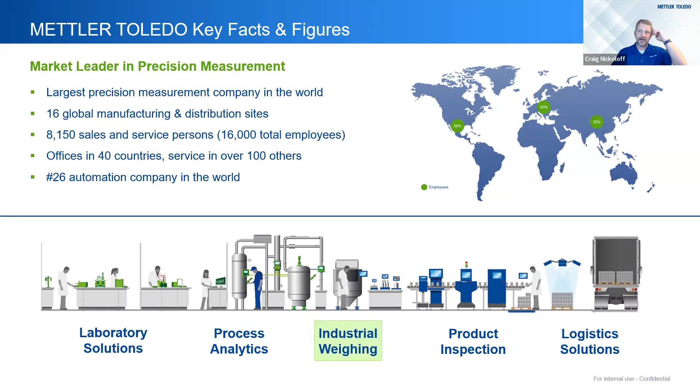And then finally, we are the number 26 automation company in the world. You wouldn't necessarily think that from precision measurement, but we've developed some products that interface in a very friendly way with a lot of automation products out there, whether it be Rockwell or EtherCAT or Siemens and whatnot. But we'll get into more of that later. Today, we are going to talk about our industrial weighing solutions and ways to specify components for that.

So a bit of a look at the portfolio that I'm talking about. Hey, we've got solutions for every application in weighing, whether it be from 1 microgram all the way up to 1 million kilograms. The demonstration of various product lines: our APW product line top left, bench portable and floor scales in the middle there, the platform scales, and then our weigh modules at the end.

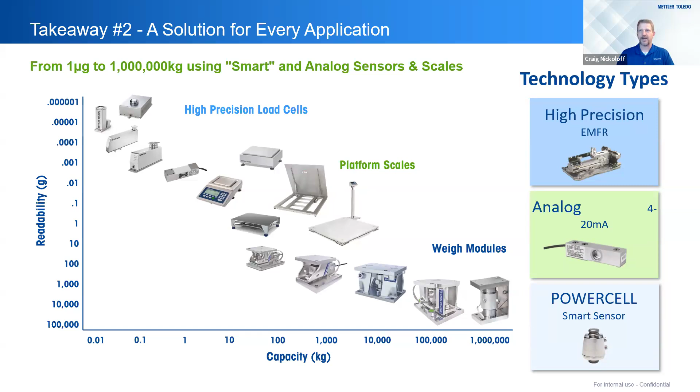And it varies whether it be analog to smart sensors. But that's just to give an idea of the components that you would be encountering when we're trying to specify sensors for your weighing applications. So first, we're going to take a look at the methodology for scale selection.

It's important to note that a capacity-based scale selection doesn't exactly account for accuracy. So we're going to look at 4 examples here, with the basis being: hey, we're weighing 1 kilogram of fine Swiss gold, and the cost per gram, at least at the time of creating this slide, was $75.57.

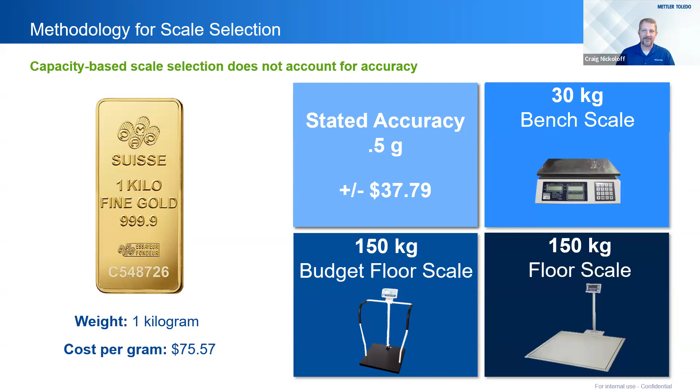So again, we're looking at 1 kilogram, not 1 gram, but the cost per gram is $75.57. So first, hey, if you're looking at a 3 kilogram balance, this particular one would have a stated accuracy of, let's say, 0.5 grams. So if you're looking at the variability based on that accuracy, there can be a variability of plus or minus $37.79. Again, half a gram, the cost per gram was $75.57.

Next, moving on to a 30 kilogram bench scale, the stated accuracy there in this particular case is 1 gram. So that variability, with that accuracy of 1 gram, is plus or minus $75.57. Moving on, let's look at a 150 kilogram budget floor scale with a stated accuracy of 0.1 kilograms, so 100 grams. That's a variability of plus or minus $7,557.

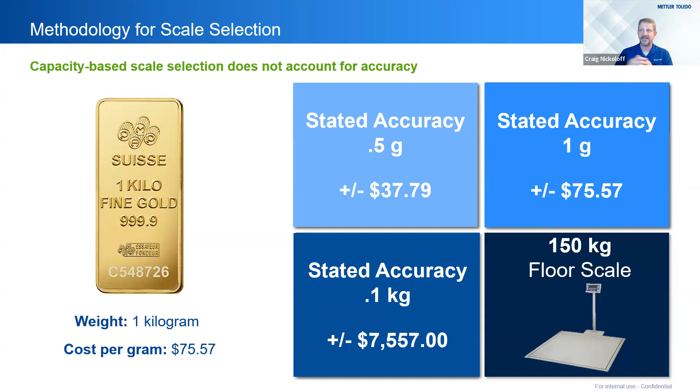So notice that we moved up in capacity here as we were looking at these. But let's take a look at a 150 kilogram floor scale that actually has a measurement uncertainty, a stated accuracy, of 0.2 grams in this case. 0.2 grams at that cost per gram is plus or minus $15.11. So that accuracy matters when you're trying to specify a solution based on what you're looking for. Because again, as we're looking at the 3 kilogram scale in that first example with that half gram variability, plus or minus $37.79, we're less than half that at a 0.2 gram accuracy.

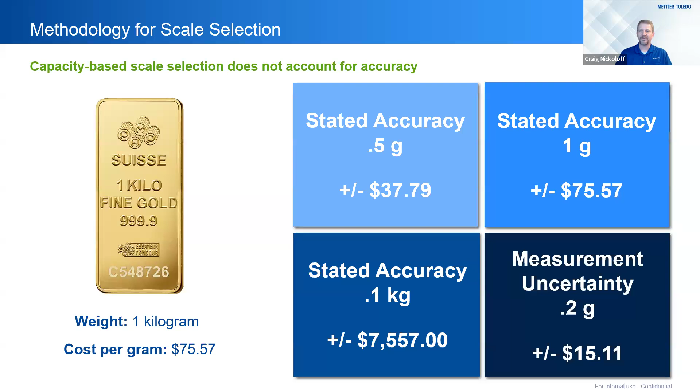So measurement uncertainty is stated there. We're going to get a little more into that as we go further into the presentation.

So, measurement uncertainty: accuracy is relative to the process tolerance. So close enough equates to accuracy. It depends on the user's needs, and it has nothing to do with level of detail or digits beyond the decimal. So we've established that no measurement is exact, because you've got that uncertainty no matter what sort of measurement you're taking. So there's some level of uncertainty in any number that we see. The user has to decide how much uncertainty in that number is acceptable before it becomes an unusable measurement. They have to determine what they want to be usable, and outside of those bounds, it's an unusable measurement. That's called a process tolerance.

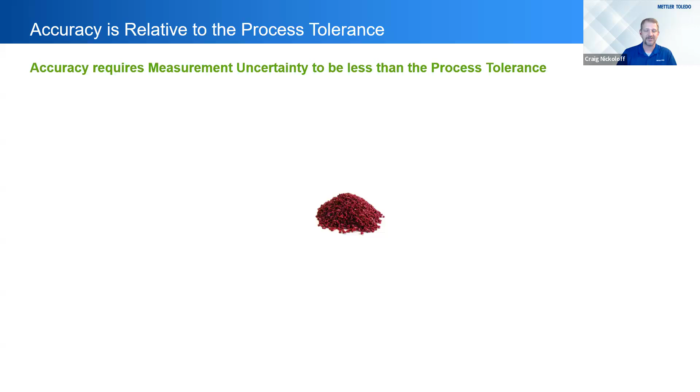Accuracy is the condition in which a measurement has less uncertainty than the process tolerance permits. So exceeding it makes the measurement inaccurate. And we'll take a look at that here with this example.

So what we're looking at here is 100 kilograms of this product, this red powder, with a measurement uncertainty of 0.5%. That translates into 0.5 kilograms in this case. So you can be plus or minus half a kilogram, giving 99.5 kilograms at the low end up to 100.49 kilograms at the high end. That's with a measurement uncertainty of 0.5%.

So let's say that the process tolerance was designated as plus or minus 1%. So you're accepting measurements within plus or minus 1%, so from 99 kilograms at the low end to 101 kilograms at the high end. Note that the measurement uncertainty noted there in blue is smaller than that acceptable process tolerance, so we would count this as an accurate weighment.

Now, if you flip that, and your process tolerance is 0.5%, but the measurement uncertainty of the scale you've selected is actually 1%, that measurement uncertainty is larger, wider than that process tolerance. So this application would then be identified as an inaccurate application. We just switched those two just to show you the relationship between process tolerance and measurement uncertainty.

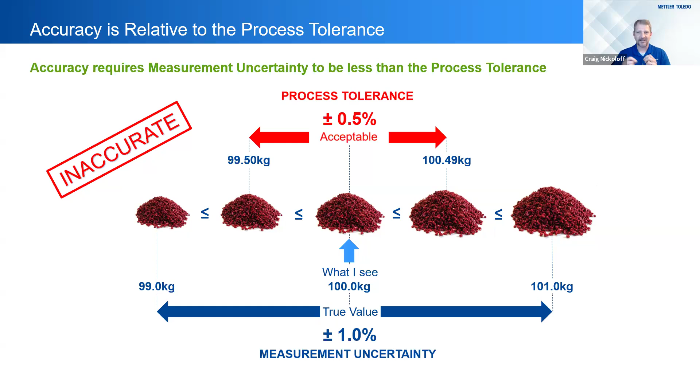We always want that process tolerance to be larger than the measurement uncertainty. And we'll get into how to identify those as we move along.

Quick note here, Mettler Toledo, as a company, defines measurement uncertainty for weighing components and configured systems in a report and methodology we refer to as GWP, good weighing practices. But we're just going to speak generically about the approach as we move along in the presentation. So you just need to define the accuracy requirements.

Things to think about: the criticality of your application. Are your measurements incredibly important? Is there a high risk in that you're measuring, say, multiple materials in a vessel? There's high cost materials—what happens if you have to scrap a batch or something? Is it a massive hit to the bottom line of the company? Or is it just something that's been planned for and the material isn't all that expensive?

That falls into the low risk measurements. So low risk measurements: if you're just quantifying inventory, you want to make sure you know how much is in the tank—you're not necessarily selling out of that tank. Or maybe you're dosing and filling into intermediary vessels, so it's not dosing into a final product. You're just trying to make sure you have an understanding of what you're dealing with before you get into something a little more precise. Or you might have low cost materials as well.

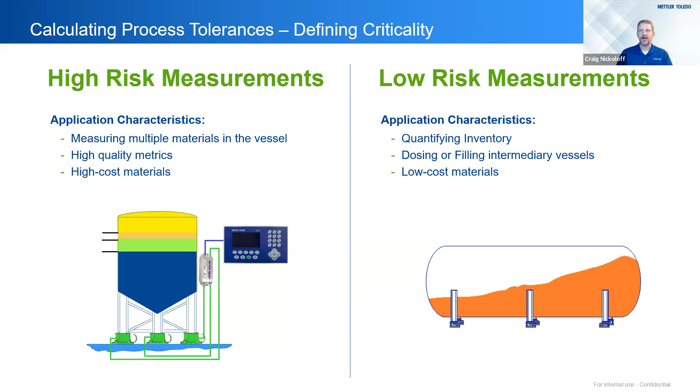So whether it's a high risk or low risk measurement, that feeds into helping you define how critical this part of the weighing process is for you. And that can then translate into identifying types of components and how accurate you would need to get in those weighments. So next, we talked about criticality—we'll talk about identifying acceptable error now.

Whenever you're considering a process, if there are multiple ingredients involved, you always want to use the tightest tolerance as the process tolerance. So in this example, looking at a few ingredients—flour, sugar, salt, butter—the tolerance is there. You could say, hey, we're willing to accept a tolerance of plus or minus 12.5 kilograms of flour, plus or minus 5 kilograms sugar, 2.5 kilograms salt, and half a kilogram of butter. So it would seem that half a kilogram is the tightest tolerance.

It is the tightest tolerance. Now you see the weights there in the middle. Those weights will help us understand a percentage that we need to account for in terms of a process tolerance. We'll take a look at that here.

Those translate into a tightest tolerance of 0.5%. The math is easy because, as we saw, 0.5 kilograms is what we're dealing with, and the weight of that butter is 100 kilograms. So we're able to accept plus or minus 0.5 kilograms, which translates into 0.5%. With that, that has the tightest tolerance, so that should be used for the entire scale. We don't want to accept any tolerances larger than that, because outside of that tolerance, it would be an inaccurate measurement, at least for the butter.

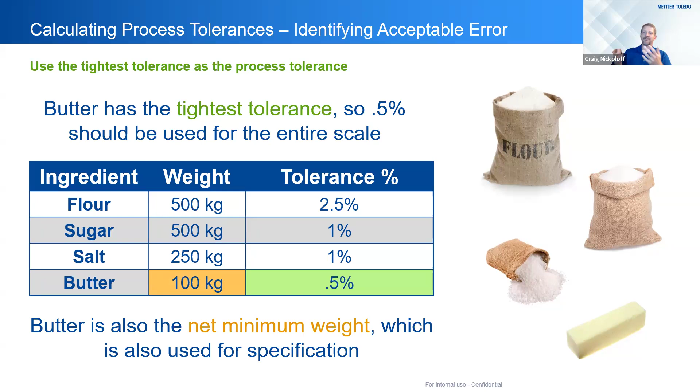Also, the lowest weight there is 100 kilograms that we need to measure of anything—this is just a note for the future. Butter's also the net minimum weight, so we will be using that in specification later on as we help identify this application. Just something to keep in mind. But the main point in this particular slide is we're looking at a 0.5% process tolerance for the entire process.

Next, we need to account for safety factors. So what are safety factors? Well, it's basically a general number that you're using to identify how much you're willing to accept in terms of variability in the process—how it affects it, criticality plays into it, a number of things play into it, and we'll talk about that shortly.

So several factors affect that tank scale accuracy. One is the dead load. The dead load accounts for the piping, the attached devices, mixers, blenders, other sensors—anything that would add weight to what you're trying to measure. Also, the support structure—maybe that's underneath the sensors, the weigh modules that you might be putting in there, or maybe it's over top of that.

Either way, you need to account for that in terms of either dead load or how that can be affected by other external influences. When we're talking about external influences, we're looking at fill cycle time. How long does it take to fill and empty that vessel? What are the physical effects on that while the filling is happening?

Temperature. Mechanical devices are generally always affected by temperature in some form, depending on how wide of a variability there is in that temperature. Metal expands with heat and contracts with cold. What sort of environmental temperature factors could those components be seeing?

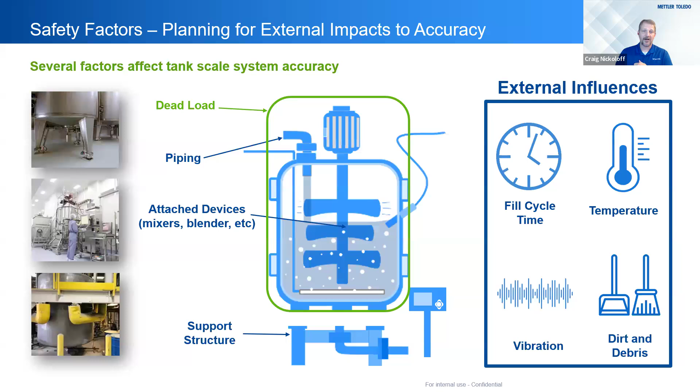So a bit of a real world look at a safety factor—we're factoring in sort of a comfort level. Here we'll take a look at a car. A car has a stopping distance tolerance of 112 feet. Do you trust that? Do you want to account for everything working perfectly without any outside influences? Probably not. It's probably safer as you're driving to add in, say, another 56 feet as an example. So that comfort level, that safer following distance added to the braking distance, totals 168 feet in this example.

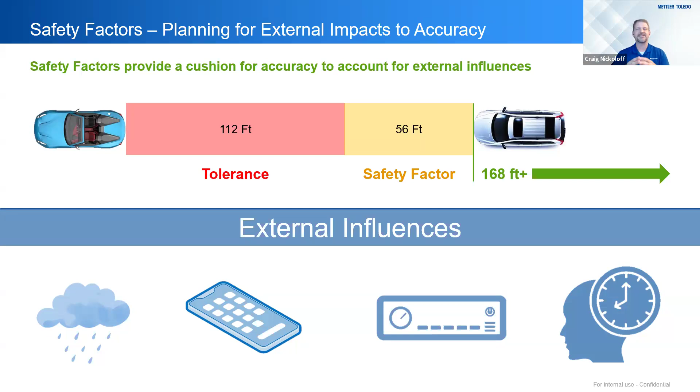You're doing that because you're trying to account for external influences like weather. Is the road slippery? Is there a phone involved? Did you get an alert and look away, and now you have less than 112 feet to stop? Are you messing with the radio or changing channels? Are you in a hurry? Just stress factors that could be affecting things as you're driving. You want to plan for additional safety in your process—in this case, your stopping distance—because I recognize that a lot of stuff is going on.

So when we're defining safety factors, it's just a number we use as a multiplier in the calculations to account for those influences. A safety factor of 1 in an industrial environment would essentially be a clean room with no external influences—like separate foundations for things so they're not affected by everything else going on in the facility. That's an almost near perfect scenario, a safety factor of 1.

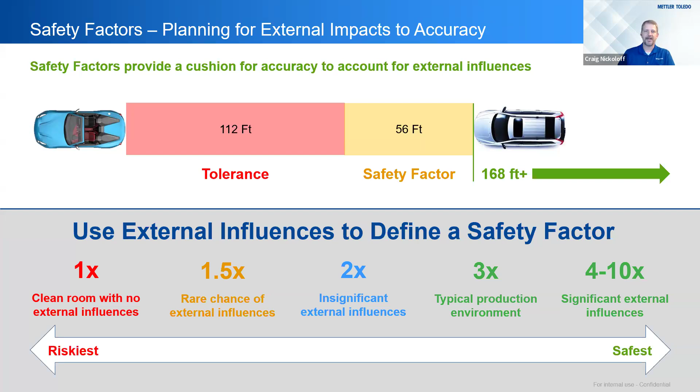What we see in general industrial environments, and what we recommend, is utilizing safety factors of 2 to 3—closer to 3 is even better. This helps us, when factoring in the effects on accuracy, identify components that are above what these safety factors specify. Then we've found measurement sensors that are fit for our purpose, fit for our application. So 2 to 3, I mentioned 3 here—we're showing in green, risky on the left scale all the way up to the safest. It all depends on your comfort level and how you want to address your application.

At this stage in the design process, we've identified what measurement uncertainty is, identified the process tolerance and the relationship between process tolerance and measurement uncertainty. We want that measurement uncertainty to be smaller than the process tolerance, which is determined by the end user and engineers based on acceptable weighments. Then there's the safety factor, depending on the criticality of the process and external influences, used as a multiplier to help identify a fit for purpose application.

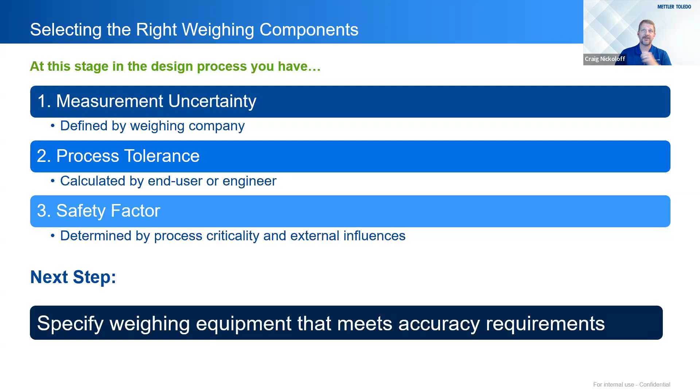So the next step is to specify the weighing equipment that will meet those accuracy requirements you've determined based on the first three things we looked at: measurement uncertainty, process tolerance, and safety factor.

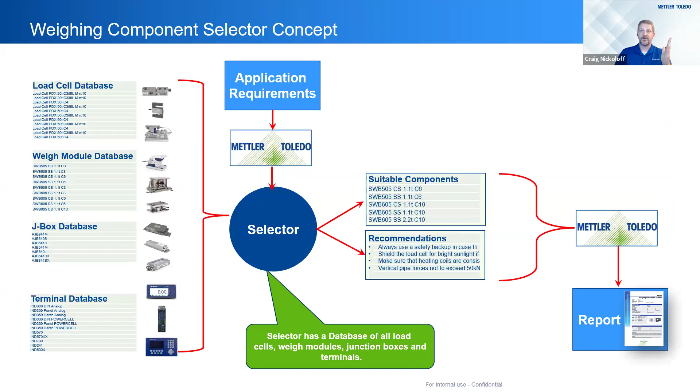So the concept here is a weighing component selector. You take your application requirements as determined by the end user through your expert, and we essentially take a database of components. In this case, we've got load cells, weigh modules, junction boxes that tie the weigh modules together, and terminals to visualize that weighment, whether visually or within your automation system.

A provider should be able to offer something to help address that fit for purpose application. The requirements should be input by the users of this weighing component selector. Those application requirements are fed in, suitable components are established based on all the process requirements we've looked at before, and finally we identify those components and it kicks out a report to help you understand your application's factors and the components that could work for it.

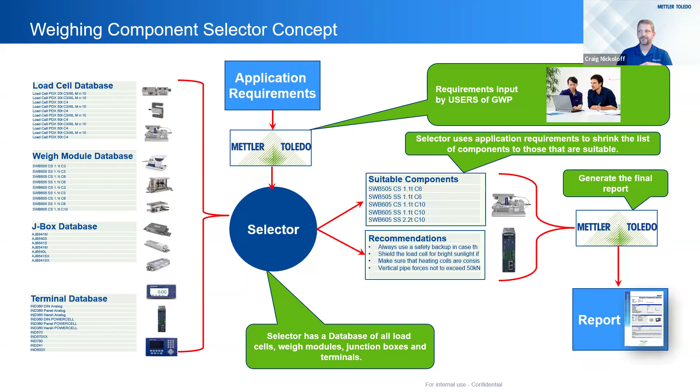So we'll take a look here at a weighing component selector interface. Nine simple pieces of information help us determine fit for purpose. The scale type, compression or tension. Is it hanging from a mezzanine? Is it being compressed? Are there weigh modules underneath all the mechanical components?

The total capacity of the application. This includes both the material, the maximum capacity of the material you're weighing, as well as the dead load, all that equipment we talked about before regarding safety factors. We've got dead load there, the vessel at number 4.

The readability, the scale readability we talked about already. It feeds into tolerance as well, and helps you identify the appropriate equipment to see the measurement properly. Number of sensors, of course, how many legs you may have under a tank, let's say.

The load to be weighed - we talked earlier about that minimum net weight, something we need to be able to see, to understand how accurately we can weigh at that minimum. If everything has essentially been fleshed out, we still need to know how much is in there. The maximum, of course - we don't want to put too much material into a tank that could overload the weighing equipment. And then any intermediate points, critical points in between that you may want to see during your processes.

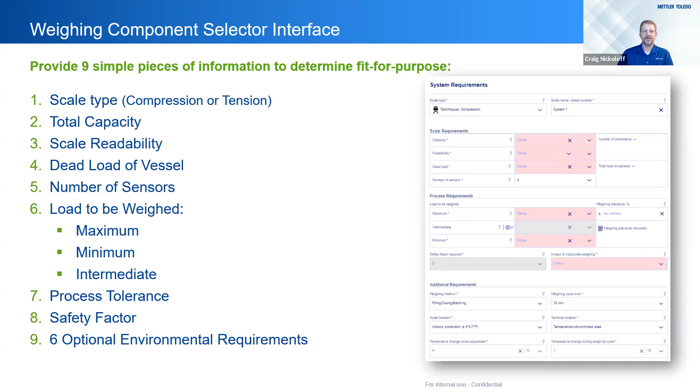So next, in the report - after those inputs are entered, the GWP software, in our case for Mettler Toledo, creates a report detailing the weighing system, taking in those factors and identifying the components.

It's great to have on hand, great for record keeping purposes, great for historical purposes, so you know if your application has changed over time and what it was in the first place. I can go back and look at this documentation to understand what we specified when initially identifying this information. It's important to have that contact information, the name and whatnot. It helps you understand what you're looking at, which scale it might have been. Maybe you've got numbers of tanks and you've identified what application this was.

What tank was this? What is tank number 6 in the facility? This is the report that we're looking at here, then the summary of the application. We already looked at that, and talked about those factors that feed into it.

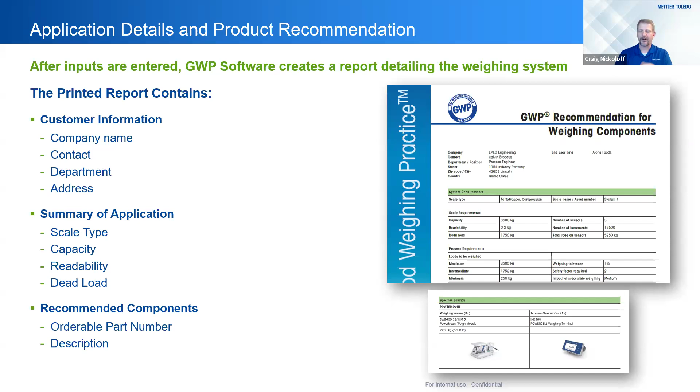And then the report should also kick out an orderable part number. So as an end user, you can look back at these reports and say, this is what I'm looking at. You may not then have to go out to the facility to find a part number on the equipment, maybe buried because of the installation. You should be able to check back and look at an orderable part number and see what you need to obtain for the future.

The report is also proof that those components are fit for purpose. It compares that overall system uncertainty to the process tolerance, as we talked about before. So it's proof of suitability to maximum and minimum load, absolute measurement uncertainty for each load. You can see that specified next to the weighing tolerance, what can we accept. We specified that already, it's laid out formally, what the scale provides, what those components we've identified, how they will perform. And of course we want to make sure that uncertainty is smaller than that weighing tolerance.

In this case, we see 0.02%, 0.04%, 0.13% at those various loads to be weighed, and the weighing tolerance we identified in this application was 1%. All of those relative uncertainty calculations are under that 1%. So ideally this should say that it's fit for purpose, and it does. These green lights, green logos, circles, are helping to identify that we're looking at components that are fit for purpose at those various loads to be weighed.

And we're considering the safety factors as well, and we see the safety factor noted there. We talked about safety factors of 2 to 3 being generally pretty good for industrial environments. Depending on the criticality of your application, you can go even higher. You can see here the components identified account for an application that would need a safety factor of 51.2. So is that larger than the safety factor we've identified? Yes, absolutely, it's all very good.

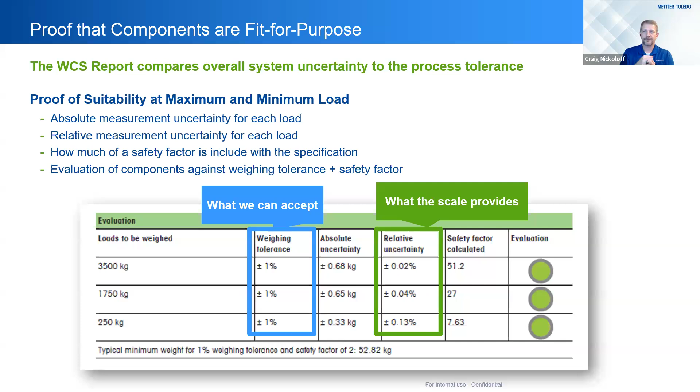And then you'll see a note here at the bottom, the typical minimum weight for, let's say, a 1% weighing tolerance, as we've specified here, with a safety factor of 2, is 52.82 kilograms. So that's well below any of those loads to be weighed as well.

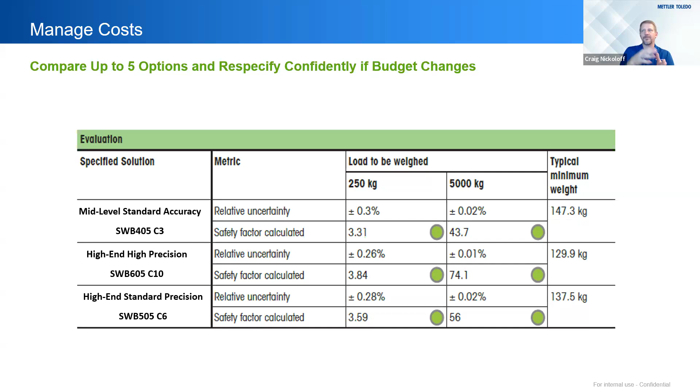The report should also be able to compare multiple options for you, to basically help you re-specify if any budget changes or whatnot. In this case, we're representing 3 different solutions from Mettler Toledo's weighing module portfolio. You can see the differing safety factors, 3.31 up to 3.84, depending on what we're looking at. It should allow you to compare side by side how that component should perform based on the capacity we're looking at.

And also, as you're taking into account those options, there's other things to look at. A trusted advisor should be able to help you identify, does this fit my application? Do I need the industry standard, or something with higher accuracy? Does my application have any external factors that could cause it to be overloaded from the side? These are things to consider as we're comparing different materials. In this case, the SWB 605 provides sensor level data, is that needed in your application? These are things your trusted advisor would walk you through, as you're helping to understand if the components are fit for purpose for your application.

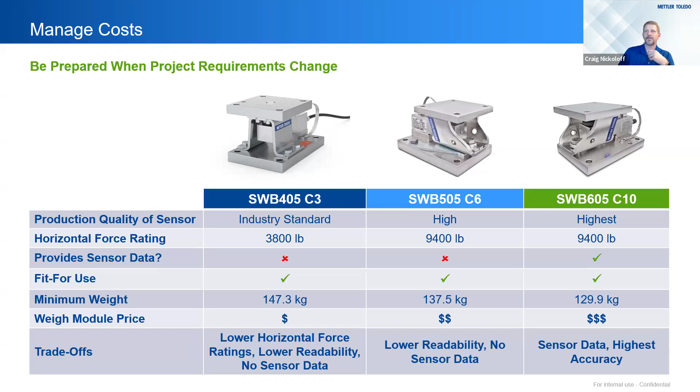So in the end, it's a good representation of what you're looking at when it comes to a report to help you identify components fit for purpose for your application.

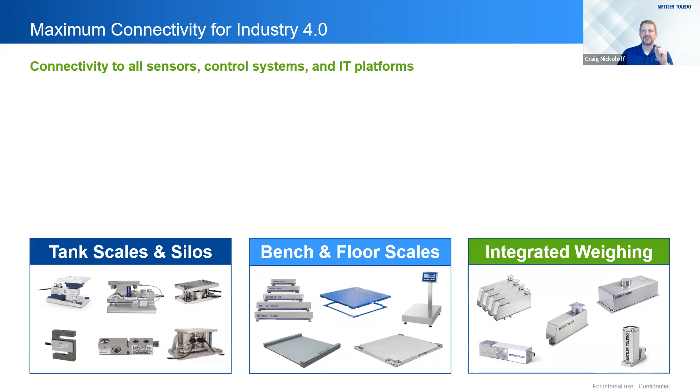So next, another thing to look at is connectivity in our Industry 4.0 world. Connectivity to all sensors, control systems, and IT platforms is now a must. In our case, we have our IND 360, our automation transmitter that can speak to the tank scales and silos, the bench and floor scales, and integrated weighing components in the automated precision weighing portfolio there on the right.

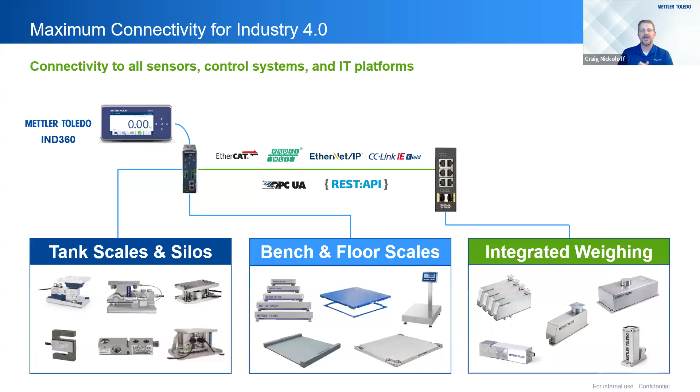Should be able to speak via various automation protocols: EtherCAT, Profinet, Ethernet IP. These all come from various vendors, whether that be Beckhoff, Siemens, or Allen Bradley. And then OPC UA and REST API when it comes to IT systems and being able to translate into those. So connectivity is key, whether you're talking to operational technology systems out on the shop floor, or IT systems up in the office with your IT department handling things, feeding that information from production all the way up for reporting.

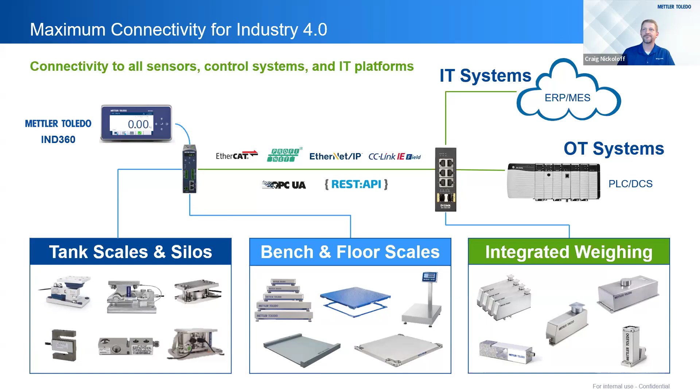Should be able to leverage easy integration to reduce your setup effort. Standard connectivity, with say the IND 360, connects to weighing sensors the same way every time, reducing system complexity. Should be able to have ease of integration when it comes to PLCs, with AOPs, add-on profiles, add-on instructions on hand, sample code that will make startup easy, allowing a controls systems engineer to take that code and plug it into, let's say, Studio 5000. In our case, we've got that already created, already certified via ODVA, and it helps things be a little more plug and play when integrating in an automation system.

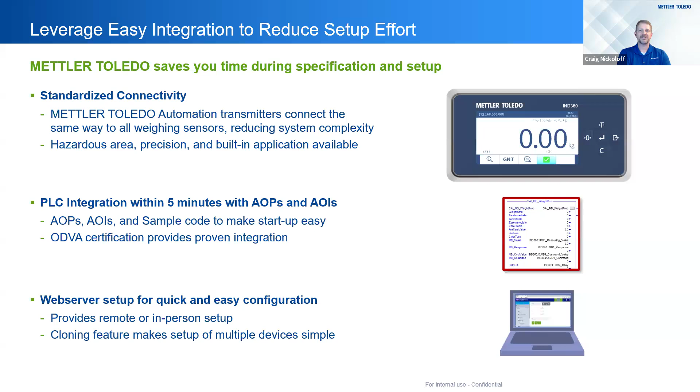And then web servers. Web servers are great from a remote access perspective. Helps you to either set up in person with a laptop on hand, if you want to bypass a display, or if you don't have a display, that web server is very much key. And a restore and backup feature also will help to clone in the case of multiple installations. So if you've got one transmitter already installed and you've got 10 more that you need to install, you can use the backup and restore function to install each subsequent transmitter.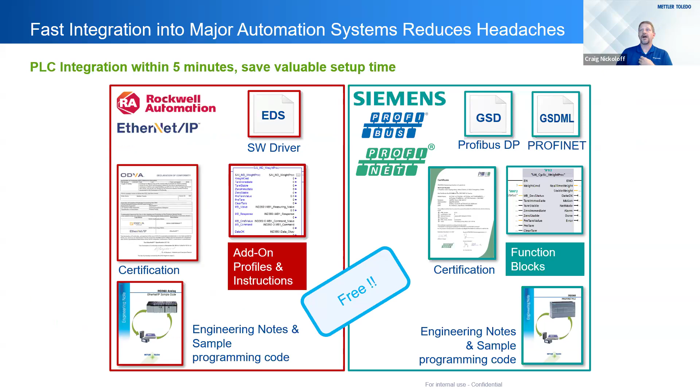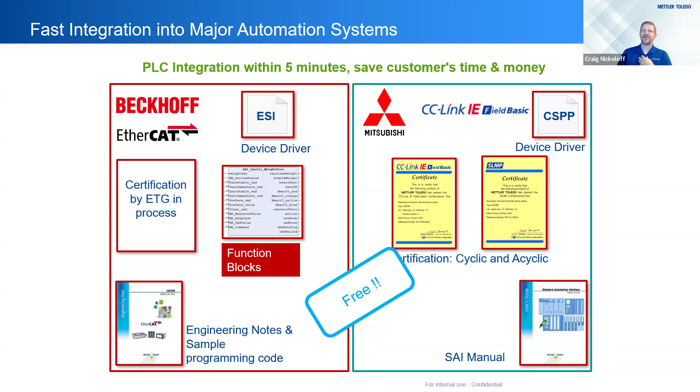Fast integration into major automation systems reduces headaches. Are you able to integrate, because of those add-on profiles, add-on instructions, GSD files, into the various automation protocols that are out there? We mentioned already Ethernet IP via Rockwell, Profibus and Profinet for Siemens installations, EtherCAT for Beckhoff installations, and Mitsubishi as well. Well, not the same thing as Beckhoff, but yes, we can account for Mitsubishi.

So again, just looking at Mettler Toledo, we've got our industry partners that we've worked with around the world: Rockwell Automation, Siemens, other software partners. And in this case, CSIA. Thank you guys for letting us present on this webinar. It's a great opportunity. Other companies we might work with, subcontractors and partners, especially in the OEM world.

We're working with OEMs, tank fabricators, machine builders, systems integrators. These are all those intermediate providers that are ultimately helping an end user install these installations. And having all that information on hand, those add-on profiles, having proof of fit for purpose from a weighing component selector, this is all very valuable information to be able to prove to an end customer that the components utilized are fit for purpose and suitable for your application.

And with Mettler Toledo, as I mentioned already, we've got the global resources, the service organizations around the world that can help out when needed, when problems are encountered. We mentioned already, it's good to have those plug and play for all major control systems. Those partners, those industry partners, and communicating with them to make sure that all our information is up to date.